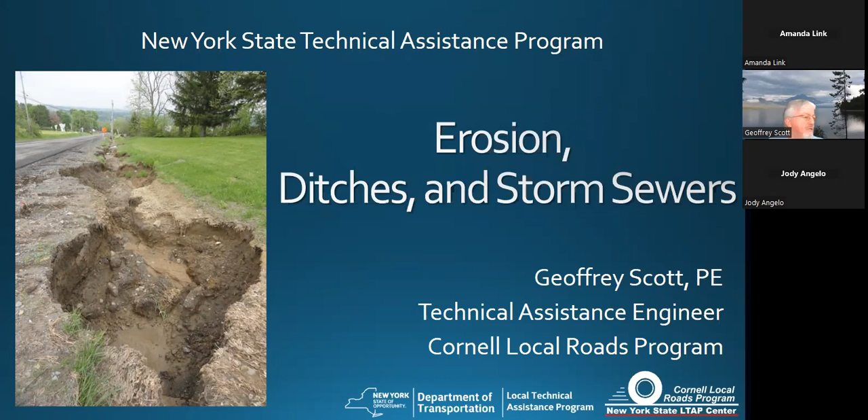The first thing we need to realize is we all live in a watershed. I've talked to people that say, I don't live in a watershed, and to me that's kind of impossible. But anyway, New York State actually has 17 major watersheds. They all drain in different directions, whether it's the ocean, the river, or even over in the Housatonic. A lot of them go to the Great Lakes.

You get the Mohawk River, St. Lawrence, so there's a variety of different locations where they drain to. This portion over here is the Allegheny watershed, which is actually the headwaters of the Mississippi, so we actually feed into the Gulf of Mexico as well, as far as parts of New York State.

But as I mentioned, we all live in a watershed, and precipitation is the lifeblood of that watershed. Without that water getting back into our soil and our aquifer, then everything fails at that point. So when rainfall lands on impervious surfaces or compacted soils, it tends to run off rapidly instead of percolating back into the ground. And ideally that's one of the main things we're going to want to try to do, is get that moisture back into the ground and recharge those groundwaters.

A lot of times, because of impervious surfaces and compact soils, we're going to get runoff that's going to contribute to flooding. And as it travels, it's going to collect up a lot of the pollutants that are going to degrade our water quality.

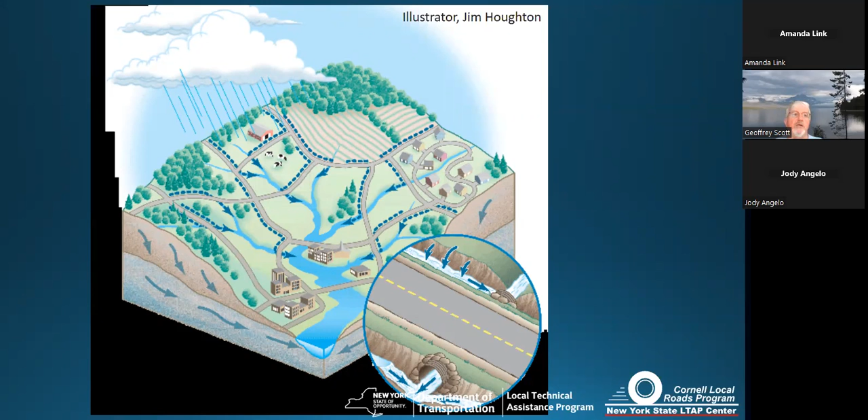So first, we'll talk about erosion. As anybody who's ever seen pictures of the Grand Canyon knows, erosion's been happening for a long time. It's nothing new, but it's becoming critical at this point, particularly in this area, where a lot of the fines and sediment that's being picked up are valuable topsoil.

Essentially, erosion is the removal of soil. It can be done by wind, rain, water, ice, even gravity. It often is the result of exposed, unprotected soil. A lot of times it's difficult to stop. It's best to prevent it before it actually happens.

Once erosion occurs, you've got that sediment transfer, and now you're chasing fine particles in moving water. A lot of the activities we can do to avoid that erosion are just paying attention to revegetation and protecting and redirecting any kind of off-site surface water. So just be aware that it is preventable to a degree. If we make those efforts, we can reduce that erosion and reduce the problems that go along with it.

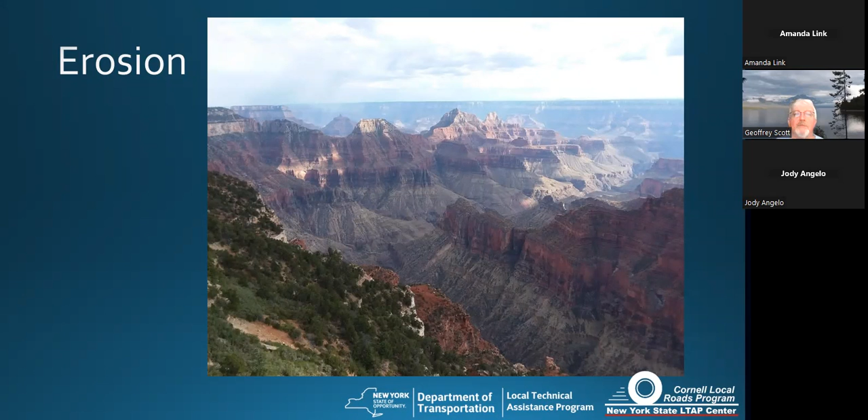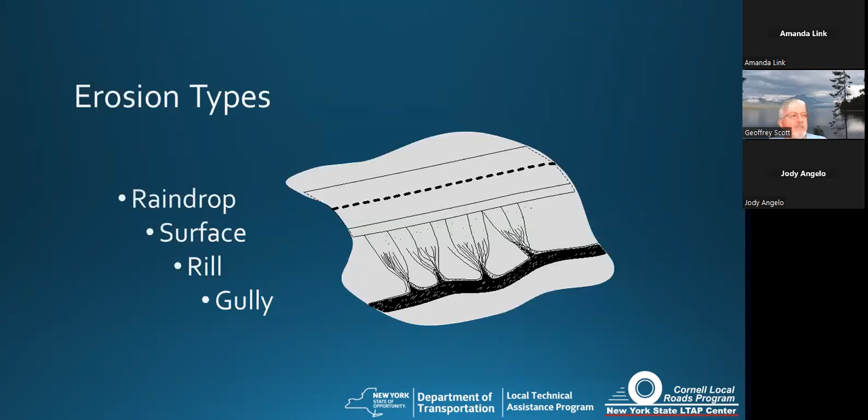Today, we're just going to talk about mostly water erosion. So the main types of water erosion are basically raindrop, surface, rill, and then gully erosion. Typically, erosion is essentially the dislodging of particles.

With raindrop erosion, typically the splash of a raindrop will hit exposed soil. That raindrop travels between 25 and 30 feet per second, so it's got some force behind it. As it hits that soil surface, it can dislodge small particles within that exposed soil. Once that gets dislodged, it can get picked up by runoff that carries it away and be transported downstream.

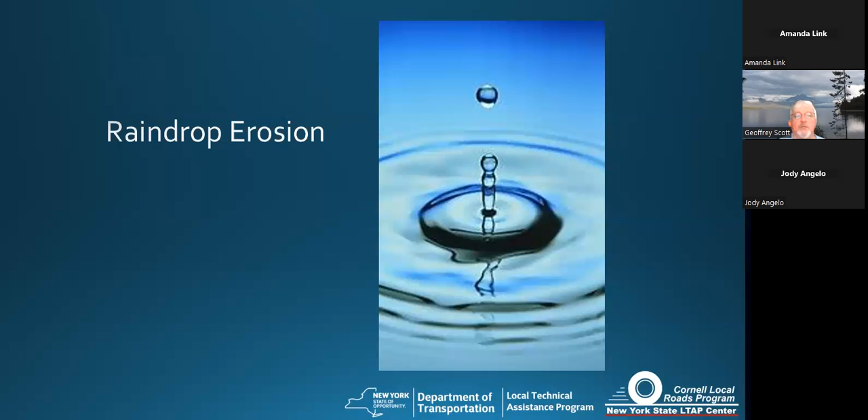So that is basically the beginning part, and this is one of the reasons we want to try to revegetate as soon as possible after exposure, when you expose the soils.

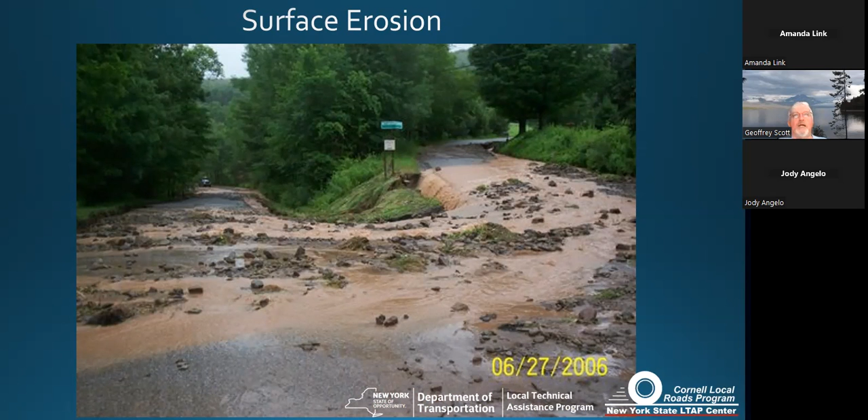ability for it to dislodge and carry particles downstream. Rill erosion is basically once that surface runoff starts to become channeled, develops into rivulets or well-defined channels, and they can be up to several inches thick or deep. This advanced stage of surface erosion is essentially called rill erosion.

And it can happen on stockpiles as well. It's another reason we want to try to protect those stockpiles. Not only can wind take the material off the top of a stockpile, but the rain can wash down the sides, create these little rill erosions, and carry the smaller particles off. So again, another reason for vegetation.

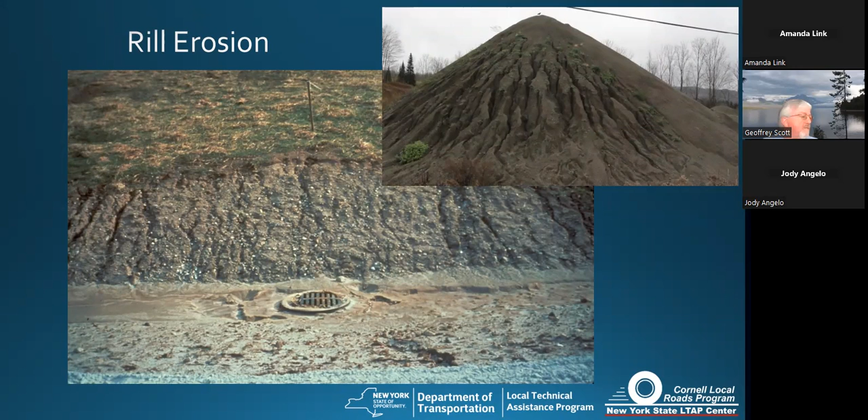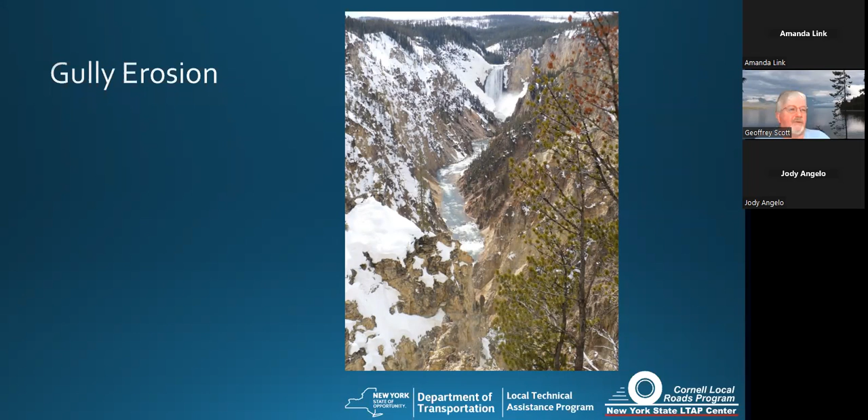Once it gets a little bit excessive, then you're going to get the gullies. Out in the Ithaca area, they have their gorges. Those are cases of severe erosion. They've created gullies, and if they're left unrepaired, they can tend to grow even more.

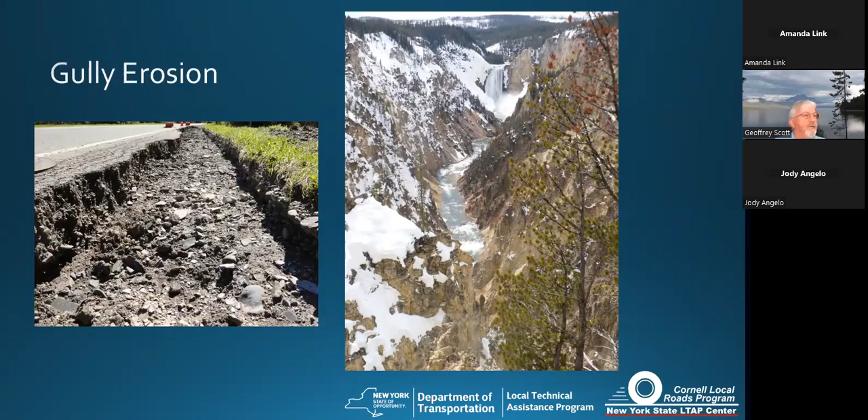This picture here is basically after a large storm. The shoulder wasn't strong enough, wasn't designed properly to shed the water off of it into the ditch adjacent to it. So the water channeled, concentrated, and eroded itself and created a gully adjacent to the roadway. So again, just a more severe situation.

Some of the erosion issues are that moisture flows downhill and picks up those particles. If the embankments aren't strong enough or the flow is excessive, we get cases where the soil itself starts to disintegrate, erode away, and fall and flow downstream. In this case, you can see it's potentially inflicting damage upon this cemetery here. That could be not only unsightly, but dangerous and costly.

So again, removing that soil can cause substantial amounts of damage. It's not unusual for rivers to actually erode away backyards, expose septic systems, and wash out buildings. So again, being able to control that water flow, that excess flow, if we can capture it and somehow get it back into the ground before it gets downstream and starts flowing quickly, we're going to have a lot more success in protecting ourselves.

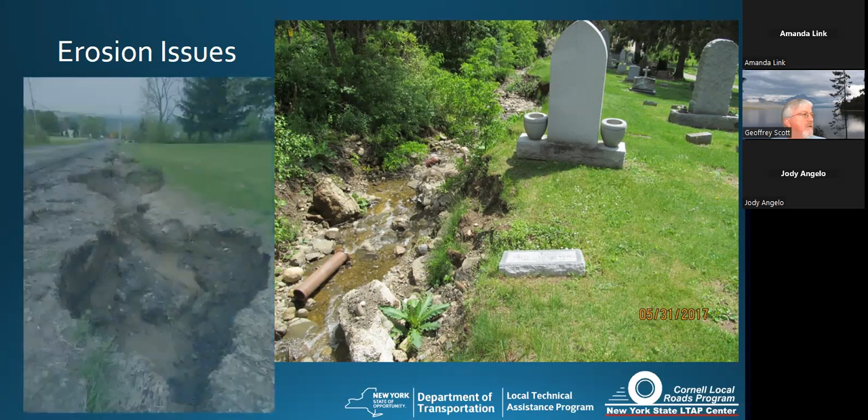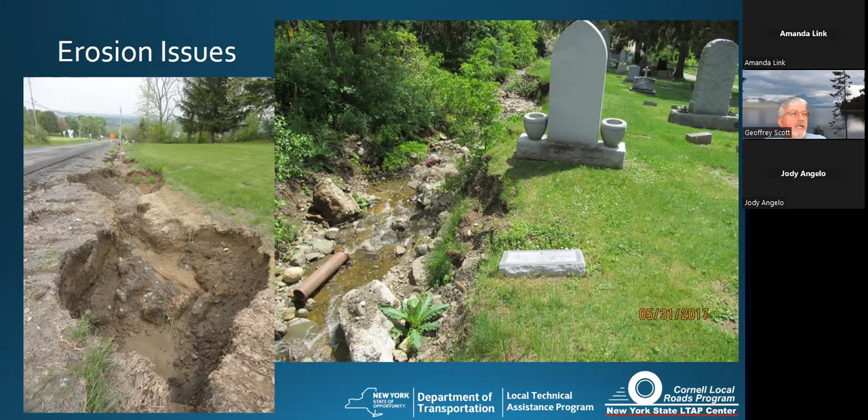Again, it can even happen along the side of roads and ditches and stuff. A lot of times the water will come down a little too fast. We'll get that high intensity rain for a short duration, and it's just more than the soil or the ditches can handle. So there are a lot of issues associated with damage from eroding soil itself.

Then you get the sedimentation, once the particles in the sediment and soil pieces start to flow. They get carried downstream, and as soon as the velocity of that flow tends to slow down, the particles fall out because it no longer has the force to push and carry them. And this is what you'll get.

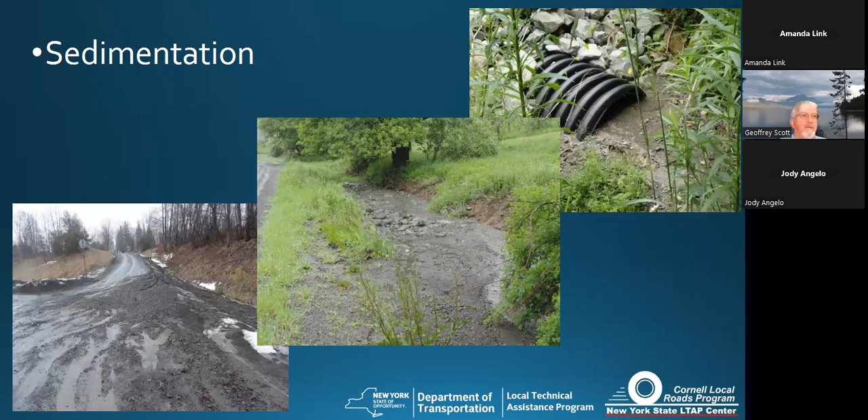You'll get the water flowing out from ditches up above. You'll even end up with culverts full of sediment. All this adds extra maintenance and labor. So we can try to control that erosion and keep the soil where it belongs. It's going to be better not only for the surface of the soil where it is, but also for controlling our maintenance downstream.

So some of the obvious things you see is the erosion that comes out. You start to see the soil moving and eroding your lawns, your backyards, cemeteries, or whatever it might be. But there are other impacts that happen as well. As fine particles flow downstream through that network of streams in the watershed, that sediment can be discharged into ponds, lakes, and a variety of other places.

As sediment flows out of streams and into lakes, once it slows, the particles drop out. And as they drop out, those sediment particles land on top of the vegetation. Once it covers them up, it reduces the ability for those plants to do their photosynthesis process and release oxygen within the water. So as that sediment lands on those plants, you're going to have a decrease in the amount of dissolved oxygen, which can result in a decrease in the ability for the aquatic environment to survive.

It can also cover up and land onto small aquatic animals, which can cause them to smother or suffocate. It also delivers a variety of different pollutants that can be harmful not only to the aquatic environment, but to people as well. So we need to be aware of what we're doing here.

Additional issues: aside from the sediment being carried down, it carries a variety of different things. There's debris or gross solids, which include trash, leaves, litter, organic debris, which can all result in human illnesses when they collect and enter into ponds, swimming areas, or various places where humans interact.

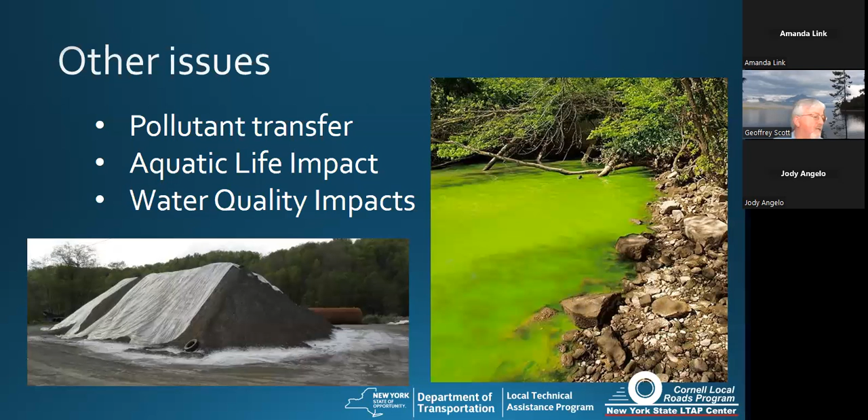Chlorides, essentially salts, can impact the survival of macroinvertebrates and freshwater fish. So ultimately, the water quality of these receiving waters can be drastically impacted and cause the loss of life within that water body itself, along with some of the trash that can be hauled with it.

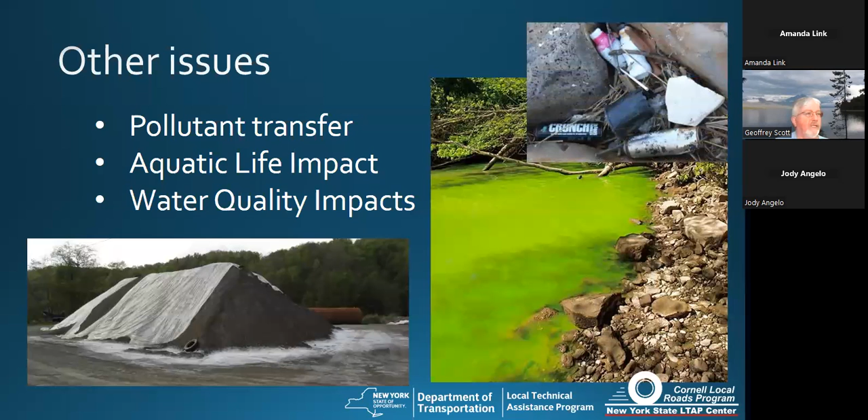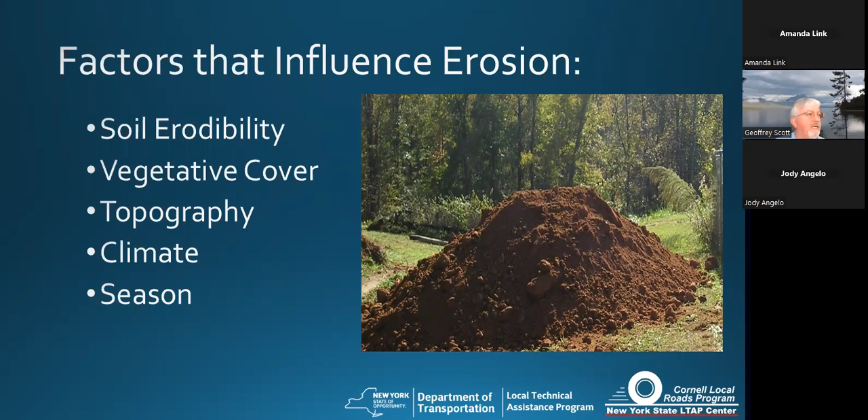Soil erodibility is basically the vulnerability of the soil to erosion. It includes soil structure, texture, and the percentage of organic material. Most erodible soils generally contain high proportions of silt and very fine sand, smaller particles that can be picked up and moved easily. The presence of clay, except for dispersive clay, tends to decrease soil erodibility. Clays are sticky and tend to bind the soils together, and organic matter helps maintain and stabilize the soil structure through aggregates and interlocking of the soil itself.

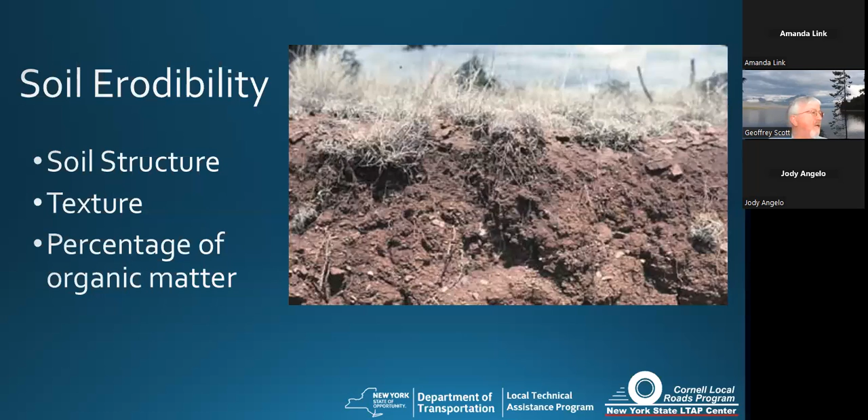This is a table from the new blue book showing different types of soil erodibility for different soils and the slopes associated with them. You've got gravelly material, a little larger with a low percentage of fines, so you get low to medium erosive potential. But as you get into finer material, that potential increases substantially as the slope increases. So being aware of the type of material you have really impacts how easily that soil is going to erode.

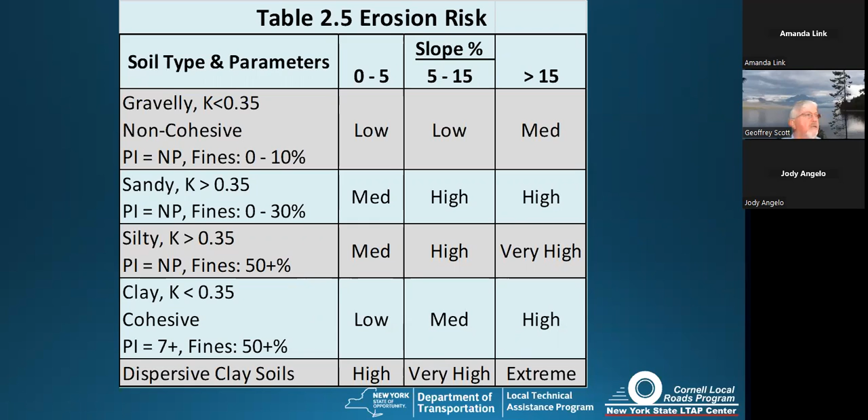Vegetative cover protects the soil from erosive forces, particularly raindrop impact and runoff scour. The top growth shields the surface soil from raindrop impact, while the root mass holds soil particles in place. The grass can also serve as a buffer strip that helps filter out a lot of that sediment and the contaminants carried with it in surface runoff.

Grass can also slow the velocity of runoff and help maintain infiltration capacity with the soil. As the roots go in, moisture can follow those roots into the soil. So the establishment and maintenance of vegetation is probably the most important factor in minimizing erosion during development. If you can keep that vegetation there, it's going to do a lot as far as preventing that soil from being relocated.

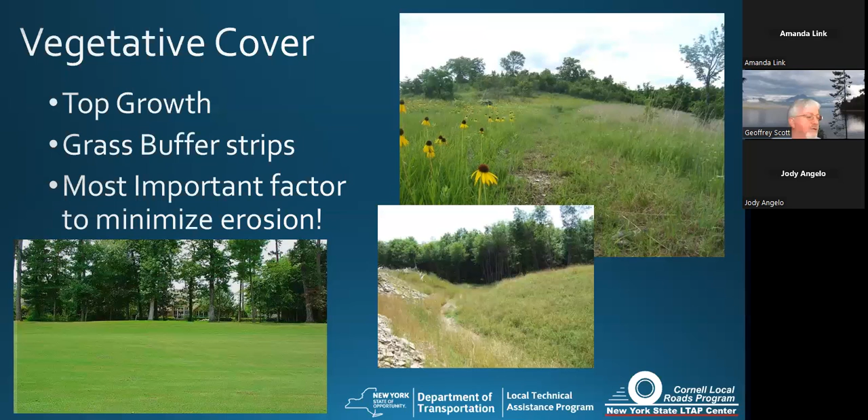Topography, or grades, essentially the slopes, the slope length, and steepness can greatly influence both the velocity and volume of surface water being controlled. Longer slopes can deliver a lot more water to the base of a slope, and steeper slopes can increase runoff velocity. When you get an increase in volume of water, you can have problems at the bottom because of sheer volume going through there.

If the system isn't designed to carry that volume, you're going to have flooding and erosion where it's flowing but not supposed to be, as well as issues from steep slopes. Once that velocity kicks up and moves extremely fast, the force of the flow increases its ability to dislodge smaller soil particles and carry them downstream. Both conditions can enhance the potential for erosion to occur, which is pretty obvious, I suppose.

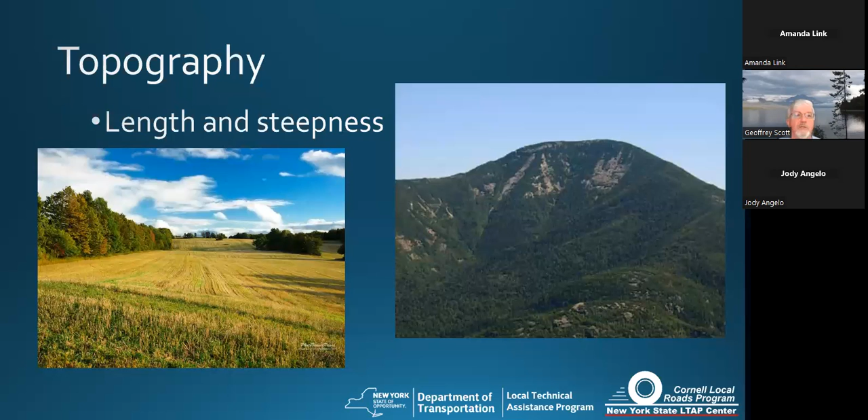Climate, or otherwise weather, can basically affect the erosion potential. Rainfall characteristics directly influence the amount of runoff that's generated. These include frequency, intensity, and duration. As the frequency increases, it decreases the chance for runoff infiltration to occur between storms, particularly

if that soil has already become saturated, then that surface water is just going to take to the hills, so to speak, downhill. And that's something we experienced with Irene and Lee. The first storm came through, filled all the ponds, filled all the storage capacity, saturated the soils, and two weeks later, the next storm came through. There wasn't really much that runoff could do but go downhill, downstream, which resulted in substantial amounts of flooding.

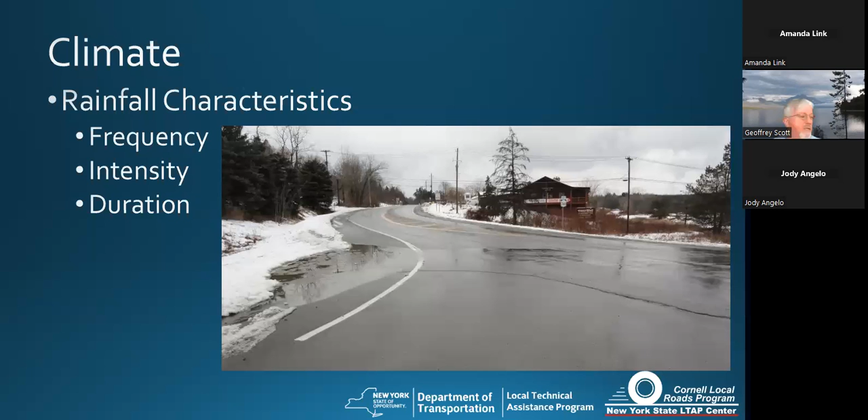As the intensity of the rainfall increases, you get to shorter durations. You might get 5 minutes, but 5 inches of rain in 5 minutes is going to cause substantial problems, because the rainfall is going to exceed the ability of the soil to actually absorb a lot of that moisture.

Seasonal variations of temperature and rainfall can define different periods of high erosion during the year. In the spring, there's a high erosion potential because as the top surface soil thaws and the ground beneath remains frozen, the top layer above the frozen layer is actually going to become more mobile. So again, there's a potential for that as well. A low intensity rainfall may cause substantial erosion because the frozen soil below is not allowing it to infiltrate.

In the summer months, the erosion potential increases due to more frequent and intense rainfalls. As we get these storms in the summertime that come in short doses but large volumes, again, it exceeds the infiltration ability of the soil.

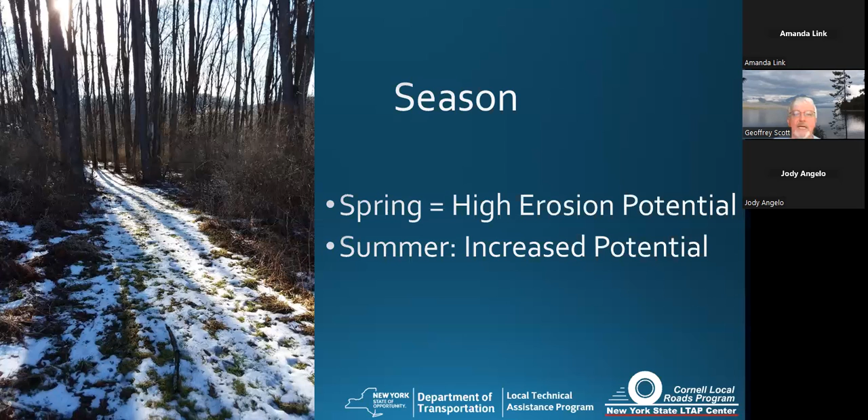So I guess we have the first question here. We're going to try to stick questions in between as we go. Question: moving sediment in stormwater does not, that's the key there: stabilize stream banks, carry pollutants, impact aquatic life, or promote growth in harmful algae blooms.

Are we getting selections here, Amanda? Yes, people are answering. I'll wait for our magic number of 75%. All right. We're almost there.

Yeah, the key word there was not. Moving sediment does not stabilize stream banks. Moving sediment does carry pollutants. It does impact the aquatic life. And it does promote the growth of harmful algae blooms. We'll touch a little bit more on that as we go. But yeah, moving sediment does not stabilize stream banks.

All right, so we'll move on to the next one. If I can get it to work again.

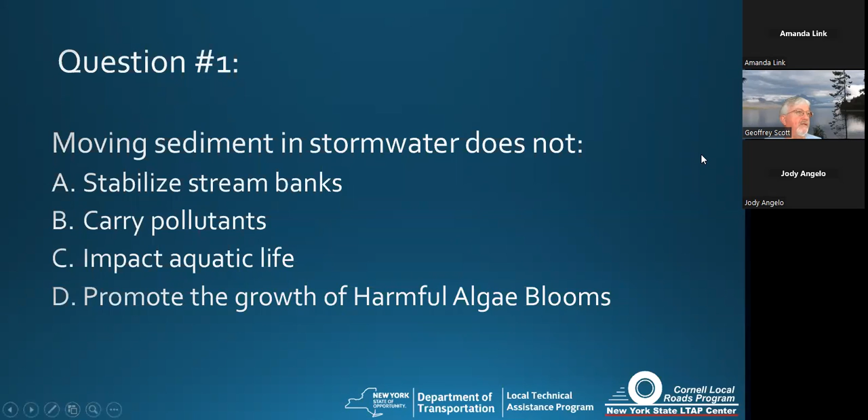Question 2. What concerns are there for nutrients carried by stormwater and sediment? First one, nutrients are harmless. Second one, nutrients keep soil stabilized. Third one, nutrients cause excessive and rapid growth of aquatic vegetation, causing harmful algae blooms. Or 4, nutrients are healthy for aquatic life.

Answers are rolling in. We got about 5% more to go. All righty.

And the one that everybody got, 92%: nutrients cause excessive and rapid growth of aquatic vegetation, causing harmful algae blooms. Nutrients are healthy for aquatic life? Not necessarily. At least phosphorus tends to fertilize the vegetation. Unfortunately, a lot of that is algae that gets fertilized the quickest, which is where we get the algae blooms. Nutrients keep soil stabilized only by promoting growth in vegetation, but not within the stormwater.

And nutrients aren't harmless for the most part because of what they can do. The answer was number 3. All right, we'll just keep moving here.

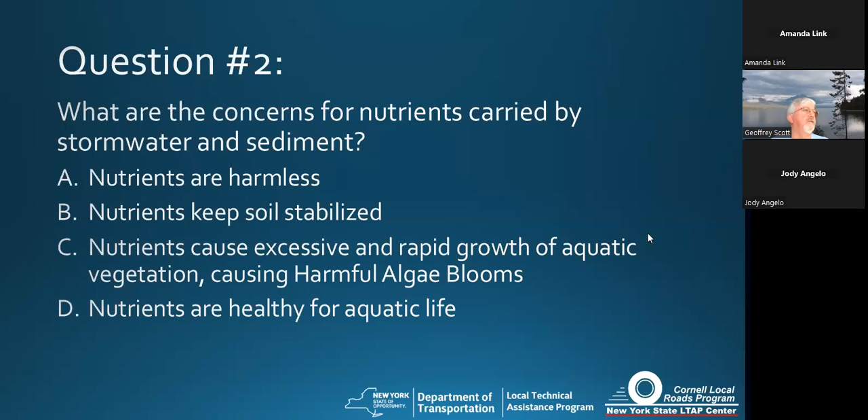We'll get into ditches. Ditches are an integral part of the watershed and can be critical for the safety and longevity of the highway itself. They serve to convey surface water, typically away from or through an area safely with minimal impacts. Roadway ditches also collect surface water from the base of the road or surrounding land and can divert water to and from the highway. Most often they carry the surface runoff to natural streams.

Ditches are often used by surrounding landowners to carry flow of the water away from their fields. Basically, field tiles collect that subsurface soil water, which reduces potential for it to go back into the soil. But again, they want to dry out that soil so they can actually use the farmland. But a lot of that's diverted into the local ditches.

A properly managed ditch is typically relatively shallow and only drains a small area. In many cases, the ditches carry the additional flow from the properties adjacent to it. And if they're not properly designed and maintained, they can result in additional maintenance and untimely costs as the damage happens. So for any kind of ditch, but particularly along the roads, maintenance is critical for both the highway and the environment.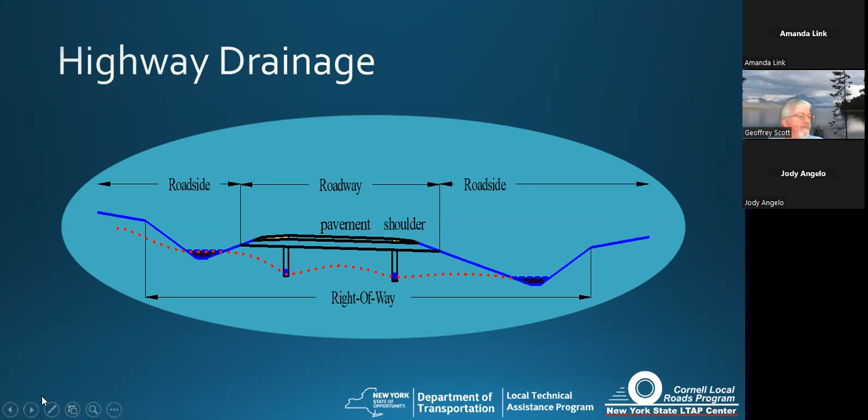Here's another sketch of streams, road ditches, and drainage basins. The road surface typically can cover up to 1% of a watershed surface area, and the drainage basins collect another 22% within that watershed. The red lines are road ditches, and the yellow area is the drainage basins for each of these ditches. Blue lines are streams, and you can see where the ditches discharge into those streams, and it works its way down as it goes.

So it's just a way of illustrating how ditches collect a lot of that surface water and subsurface water within that watershed, and how it impacts the total flow within that watershed itself.

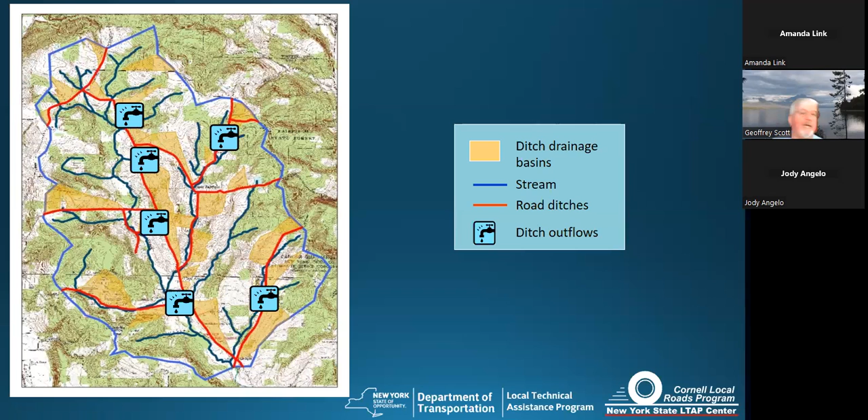The pollutant transfer, as we mentioned a little bit earlier: these roadside ditches can carry a variety of types of sediment along with them, and a bunch of types of pollutants, the heavy metals, the chlorides, the nutrients, particularly phosphorus. Phosphorus will influence growth in fresh water as far as algae blooms, so that's one of those things we need to keep an eye on. That's directly related to fertilization and controlling waste discharges.

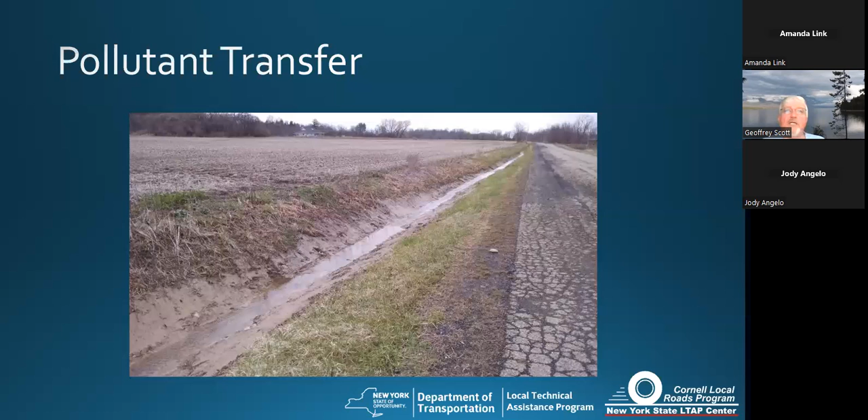So again, ditches can transfer that pollutant further downstream, and they're a direct conduit too. If they're not controlled or built properly, they can substantially impact that environment that it's leading to.

Safety is another issue with ditches. When a ditch is too deep, it can become a safety hazard. In this case, you can see where the mailman basically went to pull over and lost himself in the weeds, apparently. But it can be dangerous if you're moving at any kind of rate of speed and you get stuck in there. You could easily get substantially hurt. Something that deep may actually need a guide rail.

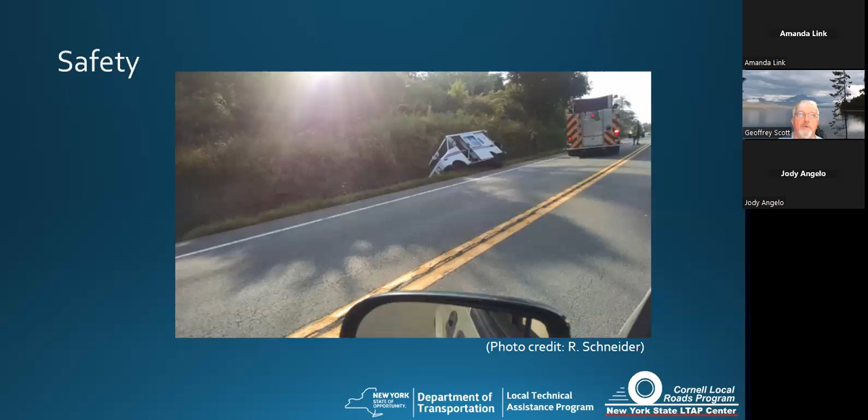Typically, ditches don't need to be that deep. Making them deeper doesn't help. If you've got a driveway culvert within your ditch, that's going to be your limiting factor in that ditch. That's going to control your flow. So if you've got a 12-inch culvert and a 4-foot ditch, that ditch is more of a hazard than a value. So just be aware, a deeper ditch does not improve your flow within the ditch itself.

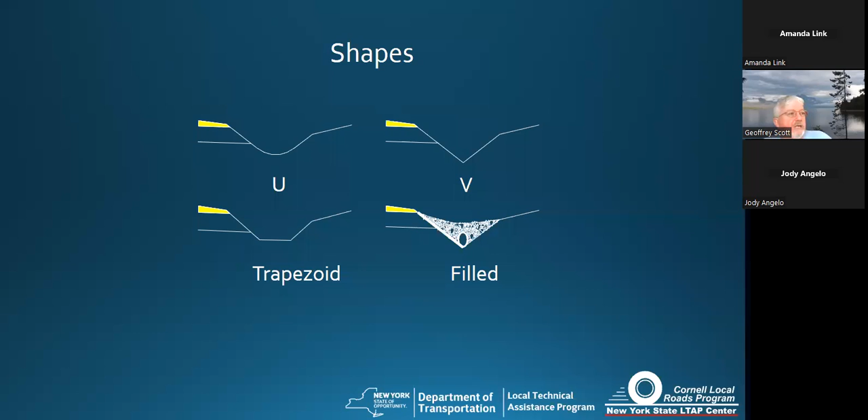Several types and shapes of ditches. You got the U shape, the V shape, the trapezoidal shape, and then there's always the filled shape. We'll talk about these. The U shape typically is done by a Gradall, where you scoop out the back and you pull it up and take that extra sediment within there. It's more efficient hydraulically. It's a good shape for erosion control, and it can be maintained and built pretty easily with an excavating machine.

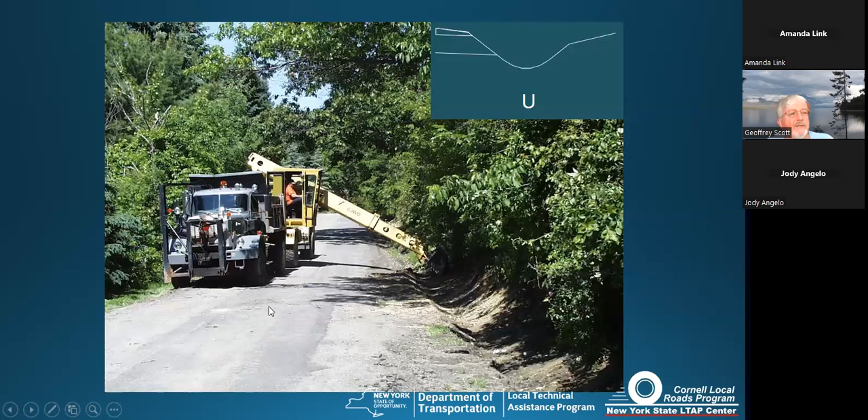A lot of times the problem with this is that when they're digging out those ditches, they actually pull that bucket toward the road, and they start to erode away the embankment here, which makes for a steep shoulder and results in not only erosion, but a safety hazard. So again, there's different ways you can do it. If you dig from the back, you can take that back slope out, and then you can cuff this off so that moisture runs into the ditch and flows.

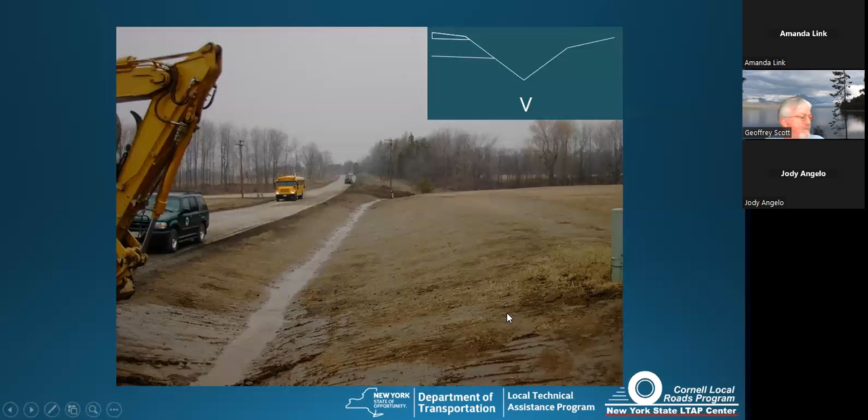You got the V ditch. This one's fairly easy to construct. You can do it with a grader. However, because they are a V, you've got this center point here that tends to concentrate the flow, and as that flow concentrates, the speed of it tends to accelerate, and then you get the increased potential of erosion. Again, it's always good to try to stabilize these. They've made an effort here of stabilizing with some hay and straw, but more needs to be done. That's inadequate.

You get the trapezoidal shape. Hydraulically, this is the most efficient because you're taking that flow and spreading it out over a wider area. You don't have those concentrations. And typically you use them for a ditch that's carrying a large amount of water. As you keep it spread out, the velocity of that flow is going to be decreased. Part of the problem is we just don't have the right of way on a lot of the local roads to build these. So that's an issue. They can be difficult to construct.

But if you do have a situation where you need to construct something like this, reach out for help. Soil and water conservation districts are here for a reason. They've got a lot of knowledge on what needs to be done. They can direct you to the right vegetation that needs to be planted. Again, the resources are there. Don't hesitate to use them. That's what they're for.

And sometimes ditches are filled with large stone to make them safer for traffic. When you've got a deep ditch with a steep slope, maybe you want to bring that elevation up so it's not as damaging to vehicles. So basically what they do is put in a culvert, typically in the roadside. They'll put some sort of fabric, some erosion control blanket, get your perforated pipe or your solid pipe in there. Typically a perforated pipe so you can collect the flow that's coming in. And then you backfill it with stone. Here's an example of it. They did the change from the ditch to a subsurface pipe.

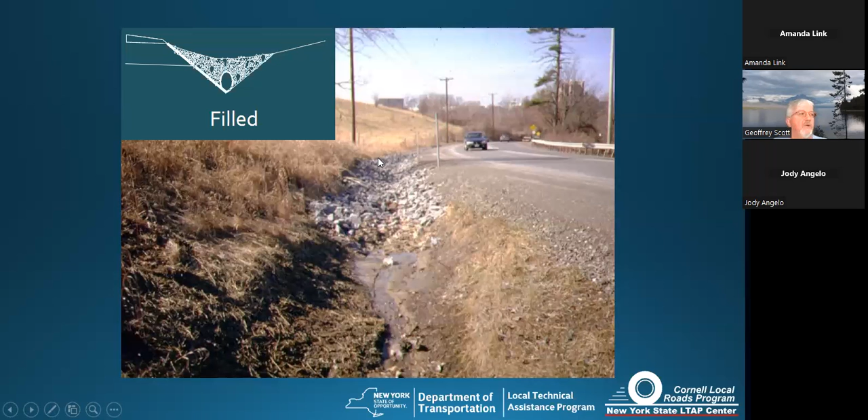So again, it's just another means of doing it. But again, another way of protecting if you've got a safety issue with your deep ditches or erosion problems, you can actually channel them and collect it in pipes and redirect them.

So as you mentioned, most ditches have most of the capacity that they need. Typically, the need for a ditch is pretty small. Again, when you start getting other things feeding into it, then it's going to be a little bit different. Then you should actually reach out to get some help, whether it's the soil and water or an engineer, or even contact us. We can do some help for you. But typically, historical perspective is enough to determine if the ditch is large enough. The flows are normal, and that's a rule of thumb.

If it's doing well, then again, your culverts are going to be your limiting factor. But ideally, as far as the depth goes, this is your clean, free-flowing subbase in your roadway. Any moisture that comes up or through it ideally is going to drain out here. So typically about a 1 foot depth difference between the bottom of your free-flowing base in your roadway and the bottom of your ditch to keep that ditch flowing.

Again, your capacity is basically going to be limited by the culvert pipes that you have in there. So if you've got 12-inch or 18-inch, that's going to be your capacity of that ditch. So an 8 foot wide by 4 foot deep ditch going into an 18-inch pipe doesn't make much sense.

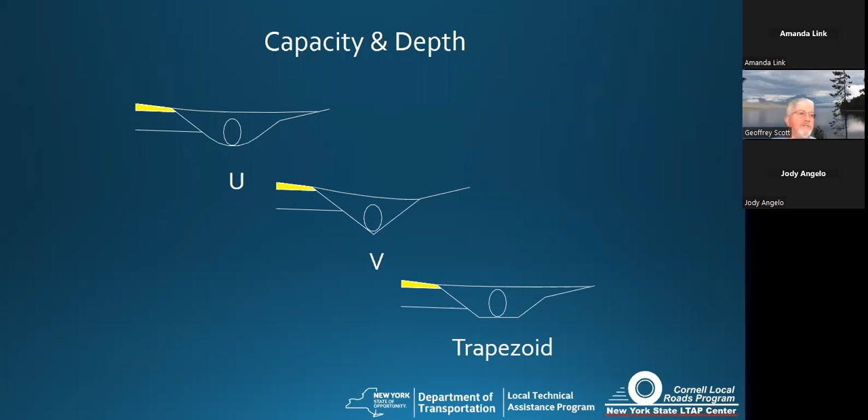Again, side slopes. You want those side slopes on those ditches to be somewhat traversable if you can. Someone gets off the road, it'd be nice if they could just work their way back out instead of just ramming right into the hole. Flat as possible is ideal. Again, we're limited on right-of-ways on a lot of the private roads or the smaller local roads. Slopes steeper than 1 on 2, vertical to horizontal, tend to be unstable and may need a guide rail to protect them from any kind of damage or errant vehicles that are going through there.

Ideally, a slope 1 on 3 is considered good. And for more information on this, you could reach out to our drainage manual, chapter 9. It's got more on the slopes themselves, but again, if we can keep them flatter, they're going to be a lot safer and they're going to be a lot easier to maintain. If they're flatter too, you can mow them, and that's going to help as far as maintenance goes.

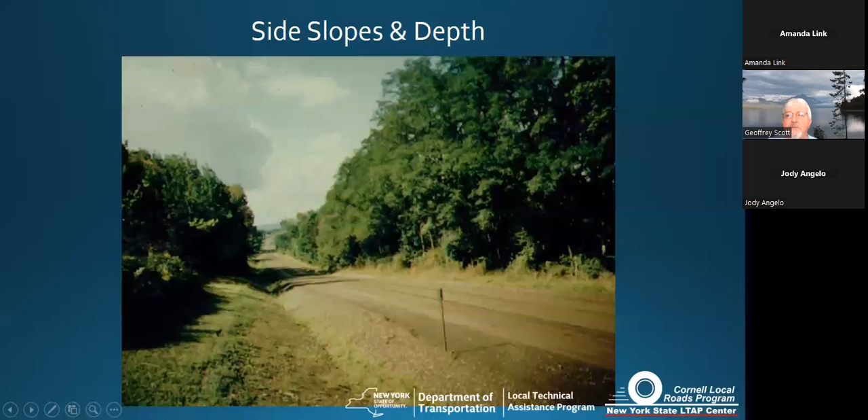Here's a case for the state over by Cornell. This is Cornell campus on the opposite side of the road, and some of the orchards on this side over here on the left side. But they came through and they cleaned their ditch. So as I mentioned, it's greater than 1 on 2, so you can see this ditch is pretty steep. It could be potentially unstable. So we came back a week or so later after they had done this, and you could see that slope is unstable. As it started to dry, that soil started to slough in here.

There's actually a cross culvert right here that goes across. So you can see on here, it's right by this tree. There's a marker right there for the culvert. Again, that culvert is right here that drains through. Because it started to slough in and carry a lot of the sediment downstream and started creating problems, they came in and actually filled it.

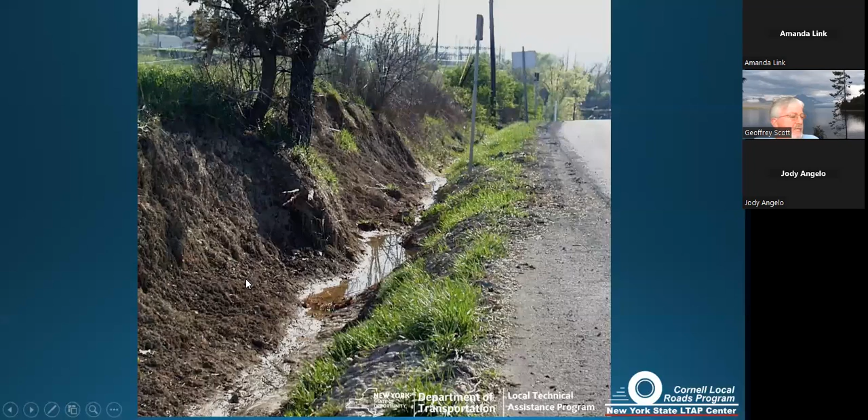So maintain that slope from the roadway, and the flow is just going to come off the shoulder and then into there. Your free-flowing base, you don't really want to mess with that. But if you want to clean it, maintain the same depth, you take it from the backside. And that'll reduce a lot of problems later on.

We've got a few pictures here. You can see that they kind of cleaned up here, left a little bit of vegetation across here. But again, they didn't do any effort to stabilize it. It's going to be actually difficult to get any kind of vegetation in there now because of the type of soil, and a lot of the fines are gone. But again, you can see they've cut that slope. The slope could potentially become a little bit unstable.

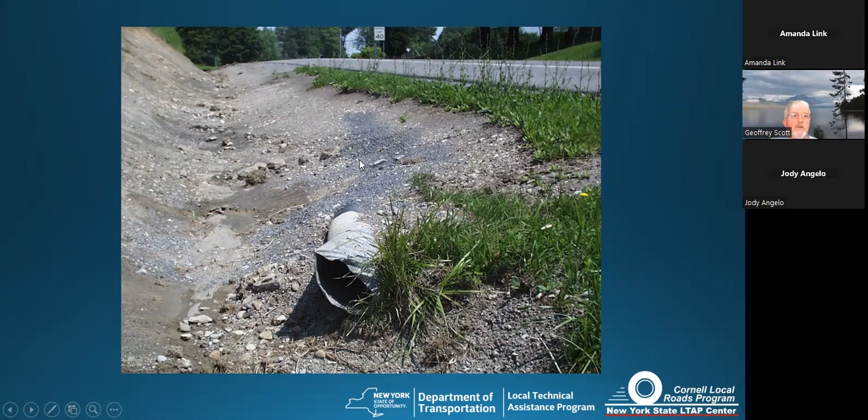There's another case. They actually did a nice job. They've cleaned it from the backside. They've got a nice U shape to it. They've got a nice shoulder here to serve as a filter strip. Unfortunately, they didn't seed it. They didn't stabilize. They didn't try to get some vegetation in there.

When it comes to this vegetation, don't be afraid to reach out to the soil. Most of the soil and water conservation districts in New York State have their own hydroseeder. You do have one in your county. Reach out to them before you start doing your ditching. Contact them. Try to coordinate your schedules.

And once you get done shaping this thing and getting it in good shape, have them come in and hydroseed it. They'll recommend the type of seed that's best for the area and the soil. You would pay for the seed, but they would come out and take care of the stabilization with their equipment. So it's a service that's out there. Don't overlook it. Again, the idea is we're just trying to protect the environment and stabilize our roads as well.

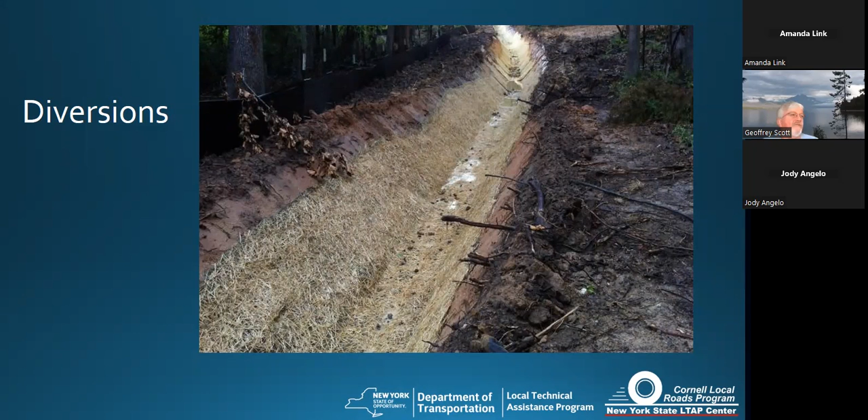Diversion ditches, again, typically diversion is basically a conveyance channel. You want to divert water off site or away from a construction site. A lot of times they can be temporary. They can be rock lined, they can be stone. If they're rock lined, the stone is going to be based on the flow, or you can line them with some sort of fabric. And again, typically temporary, comes in a variety of different things.

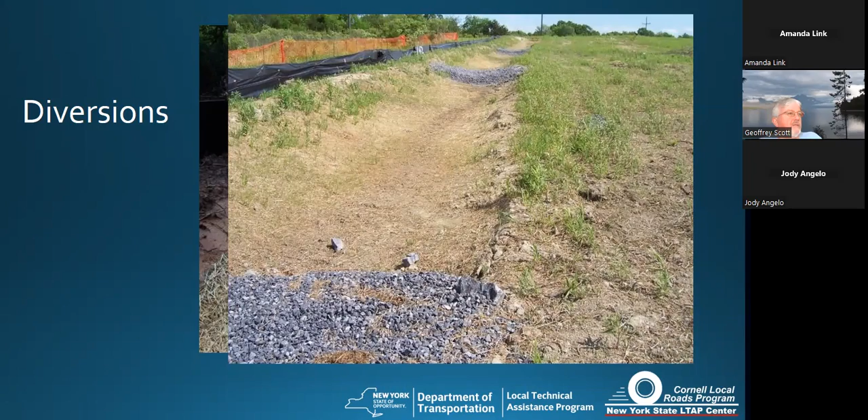They made an attempt here to stabilize it with some seed, but it looks like it dried out before it was able to stabilize. Another job site where they're diverting water and trying to collect it and get it away from the main spot where they're working. Keep that area dry, minimize any kind of erosion off that site.

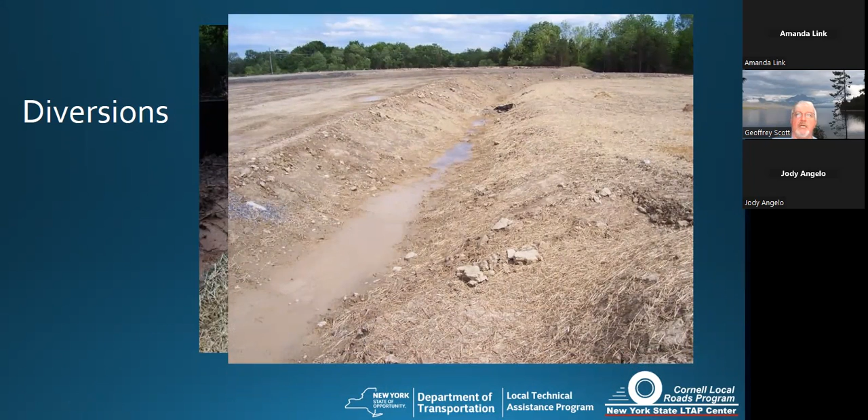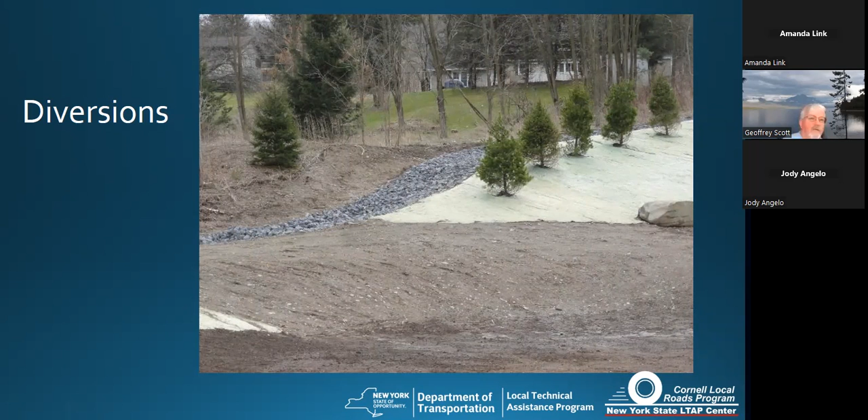And this one I pointed out before. Again, they built a hotel down below. This is their sedimentation pond for the parking lot. But they've got this all stabilized here, and they've got this diversion trench that goes up and around the whole facility. It collects that runoff from the upper wooded area. So again, the ditches have different purposes and uses, but controlling and collecting that water and preventing erosion is ideally the ultimate goal.

So storm sewers, again, typically these are subsurface collection systems designed to collect and remove surface runoff. Used to be commonplace in a lot of the residential developments, and they're in urban areas. And typically the most visual thing you might have as far as that are these inlets, drainage inlets.

As with ditches, again, the intent is to remove that surface water. As that water runoff flows across those impervious surfaces, it collects a lot of those nasty pollutants, the hydrocarbons, the debris, the sediment, the chemicals. And typically they'll empty directly into these drainage systems. If they're not maintained, it becomes a direct conduit to the discharge into any kind of local water body itself.

Limiting factor in a lot of these can be the grates. You've got bicycle-safe grates, heel-safe grates, depending on if you're in an urban area or whatever it is. Intake of those grates will vary depending on the type of openings. The more metal you have, the smaller the open area, the lower the ability of that structure to take that flow in. A lot of manufacturers have flow designs built in, typically 4 or 5 inches of head over top of those culverts for maximum intake. But if you're in a roadway, that 4 or 5 inches might not be the best thing to have. It might become a hazard. So be aware of where you're putting these things, what the flow is going to be, and the type of grate you're going to have. It makes a difference not only for safety but for inlet intake.

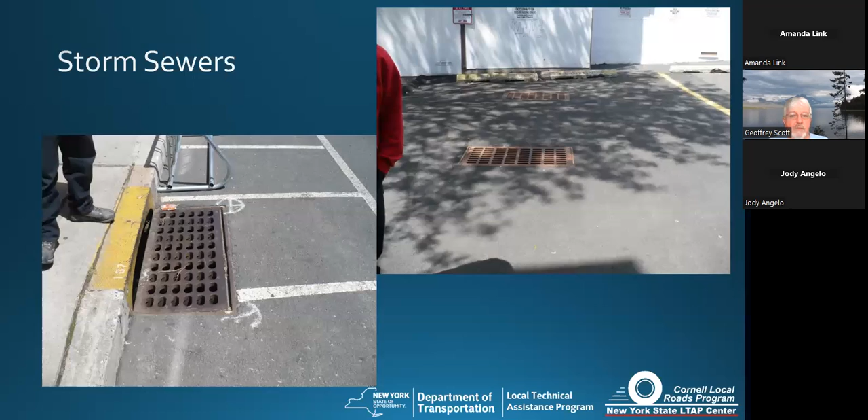Catch basins typically have issues similar to multiple pipe culverts. If they're undersized or don't have proper cover, they have the potential for floating, particularly with plastic pipes. If you don't have a lot of ballast on top, air gets trapped in there, it's going to rise and float. You've also got the pipe separation issue. Once they start to separate, you're going to lose that support around it, and you're going to start to have problems from the surface down.

There's also sediment buildup. Typically a lot of these structures have a sump built into them. Ideally, as the water comes in, any sediment will get in there, the flow slows down, and sediment falls out. Occasionally they'll have an outlet that's turned down — the idea being that any fluids or oils that float on top won't be drawn out, since you're drawing from below it.

So these are different factors and items inside these structures. Ideally, once those solids reach the one-third level of the storage capacity in that basin, it should be cleaned. Once it gets higher, as flow comes in, it churns it up and causes that sediment to get resuspended and moved right out. So regular maintenance on these things is important as well.

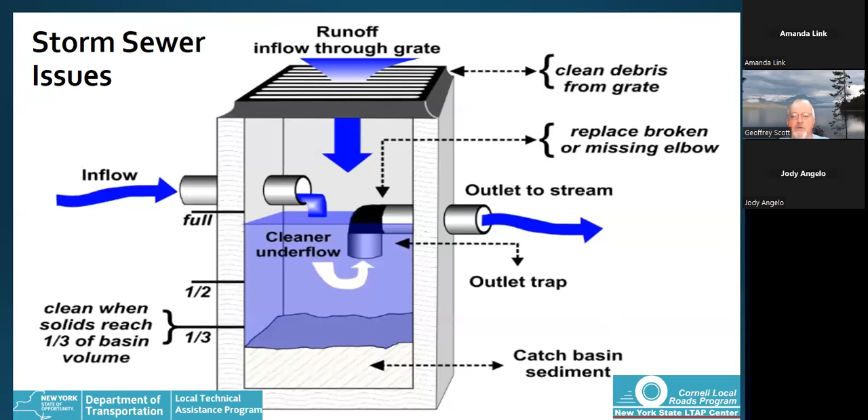And if you've got a gravity flow system, like you would with stormwater, unless you've got a pump, you're going to have to be aware of where those pipes are. Don't design a pipe to go through a water pipe. Just be aware of what you're doing and double check as you're going.

Discharge points: unfortunately, as runoff runs over those impervious surfaces, you pick up hydrocarbons, sediment, and chemicals. Older systems often direct this flow directly into the river, so be aware of what's going on there. If you can collect that sediment within the basin and keep the catch basin sump clean, you'll reduce the sediment flow carrying debris with it. These flows, when they discharge, are highly concentrated in the pollutants they're carrying, and then become harmful when discharged.

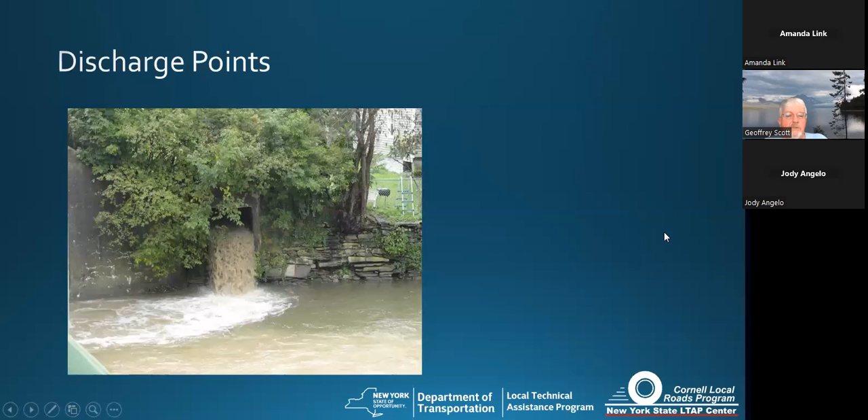So we need to be aware of that in multiple cases — a lot of these systems were built historically. This one is the village of Nyack, where their system discharges into the Hudson River. This one here is in central New York, collected from a small village that discharges into one of the rivers there. So again, discharge points are important — you need to be aware of where they're going and what's happening.

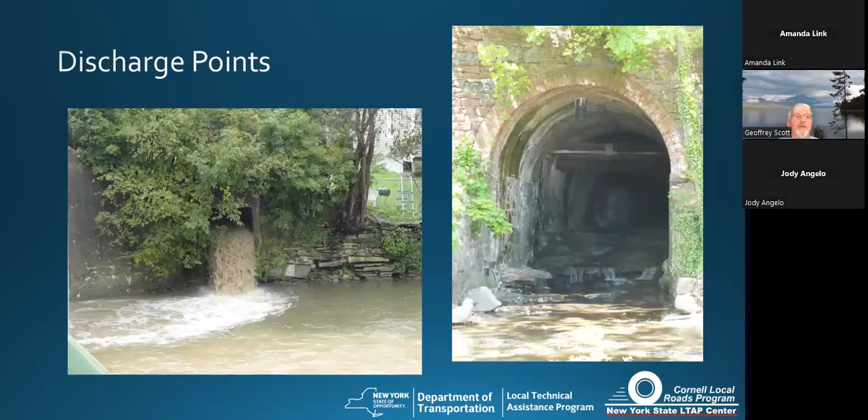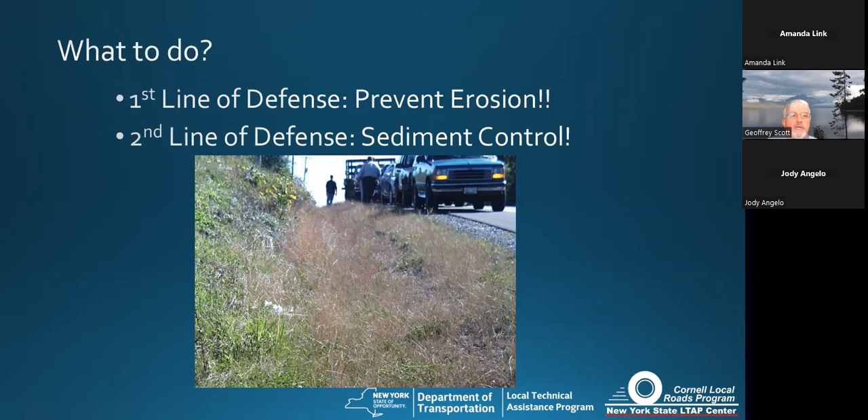So what can we do? Well, ideally, as per the DEC, preventing the erosion is your first line of defense. If you can prevent that sediment from being dislodged, you're going to have a lot more success on reducing that erosion. Once that sediment gets moving, now you've got to battle with the sediment control. You've got to try to collect it, slow it down, try to clean it, maintain it. A lot more maintenance once that sediment starts getting moving. So again, if we can prevent that erosion in the long run, we're going to be a lot better off as far as everything else later on.

So essentially, when it comes to vegetation, vegetation includes grass, brush, trees, and can all be planted to kind of reduce that erosion potential. As I mentioned, Soil and Water can recommend different types of vegetation that are best for your area and your soils, and reach out, they're there to help. The general rule is basically, if you can use vegetation, do it, because it's going to be a lot easier to maintain.

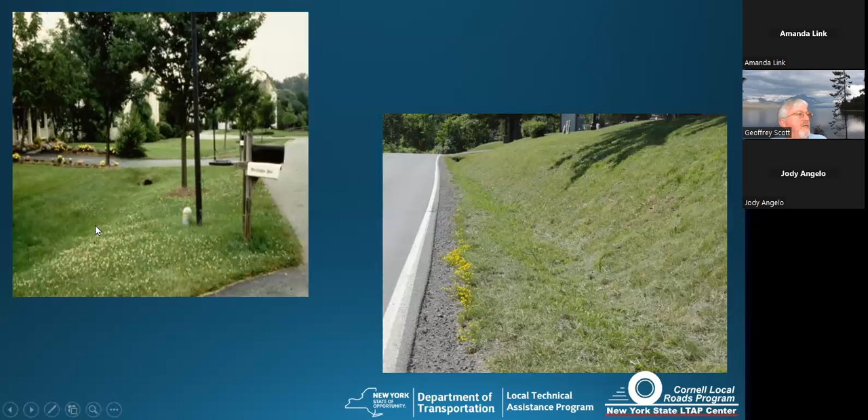It's going to be a lot cheaper to install and more pleasing to the eye. Again, with this, you're going to have that vegetation. It's going to filter out some of the sediments. It's going to promote infiltration back into the ground. There's a lot of benefits to it.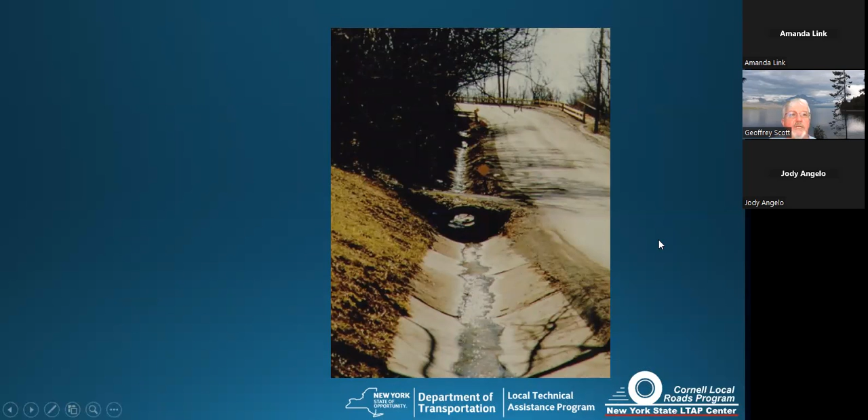Other options, again, for discharges, possibly you could use some of these heavy fabrics. First time I saw these, they were used as flooring in pig barns of all things. But they've used them for various types of livestock, and it also serves as a good matting for an outlet at a culvert head.

As I mentioned before, those ditches typically have a lot of volume. Once you stuff it into a little pipe, the only way you can get that amount of volume through it is to accelerate the speed. So as that velocity comes out of here at high velocity, you want to protect that somehow, you want to kind of protect that outlet to keep it from eroding out.

Again, you can use erosion control blankets. If you're installing these, you want to start at the low end and work uphill. That'll prevent the flow downhill from getting underneath and tearing it up. And again, you'll want to pin them down, keep them tight. Put topsoil underneath it, put your seeding down underneath it, and allow that stuff to grow up within it. Over time, it'll become a vegetated channel as well.

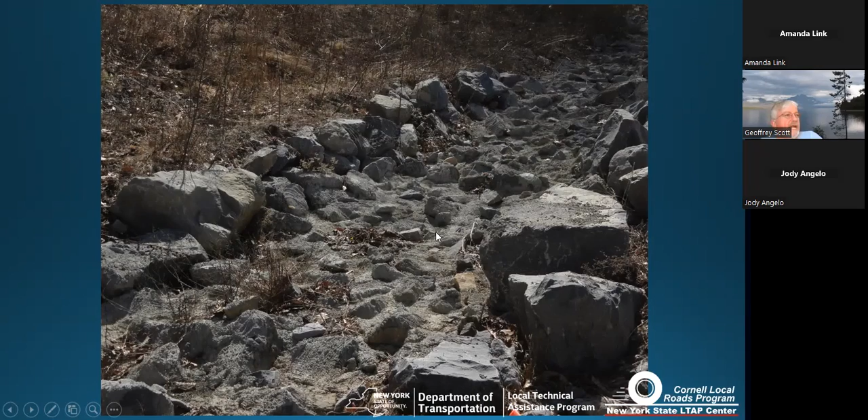In some cases, the riprap may not be large enough. I came across this in Washington County. Essentially, the slope was too great, and it was actually causing a lot of this aggregate to be washed downhill. So they ended up coming through with a slurry to help stabilize that stone. It actually works out pretty well. They can get in here with a pressure washer and wash out any kind of built up sediment.

One thing to notice with this is with any kind of loose concrete, do it in dry weather if you're going to. You do not want the chlorides and the materials within that concrete getting into any kind of water body.

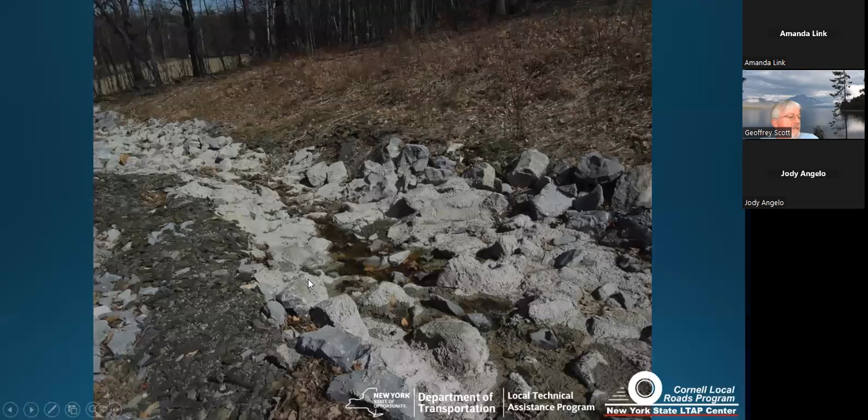Check dams are basically a means of slowing down the velocity as it's going through. If you can slow that velocity down, you're going to reduce that potential for erosion. In this case, you've got permanent ones. This comes out of a stream. You'll notice it built up. You want to try to concentrate the flow with all these check dams if you can, keep them to the center. This allows that as the water falls, you dissipate energy. Instead of it accelerating, it's going to drop and fall. The splash will create a dispersion of energy, and then the flow will maintain substantially slower.

One of the important things too is creating a subbase here, a splash pad. As this washes over, you don't want it to erode out and cause this whole thing to fail. But again, these can be temporary or permanent. There's a variety of different methods out there - it can be stone, sandbags, wood, concrete, gabions. And the idea basically is to slow that discharge rate as it flows through.

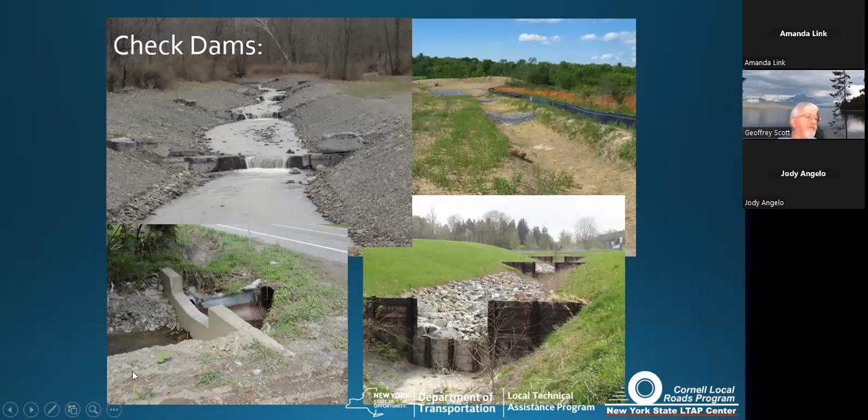So different things that can be done. But check dams, again, the idea behind these is to slow that velocity. By slowing it, it'll help filter out some of the sediment in there. Ideally, you want to stabilize the surrounding areas with vegetation. But again, the idea with check dams is basically to slow that velocity down and minimize the potential for erosion.

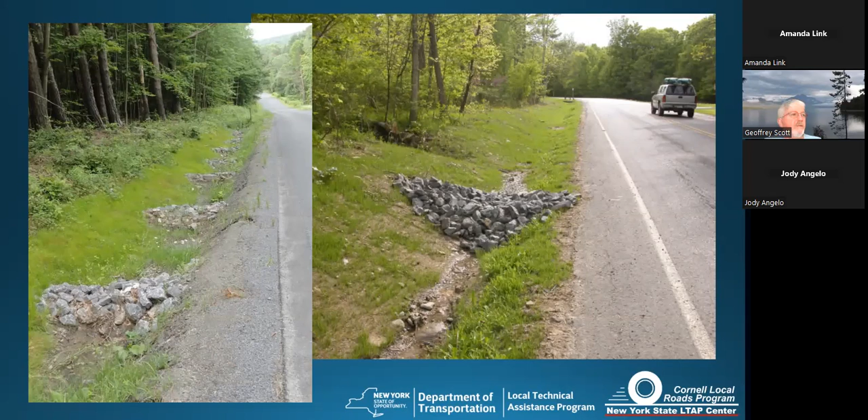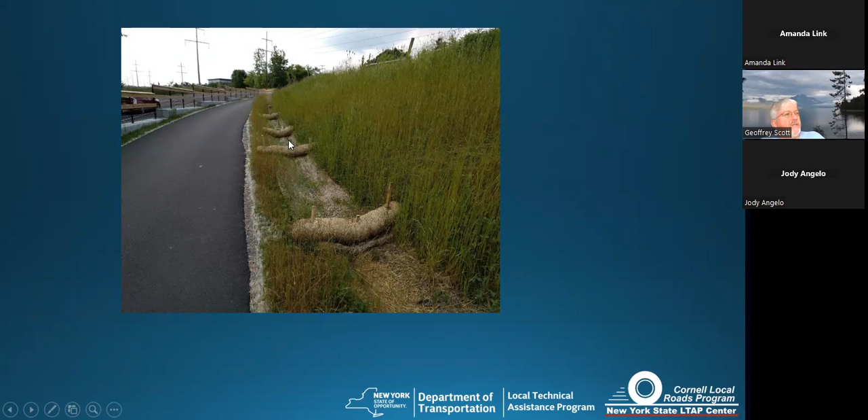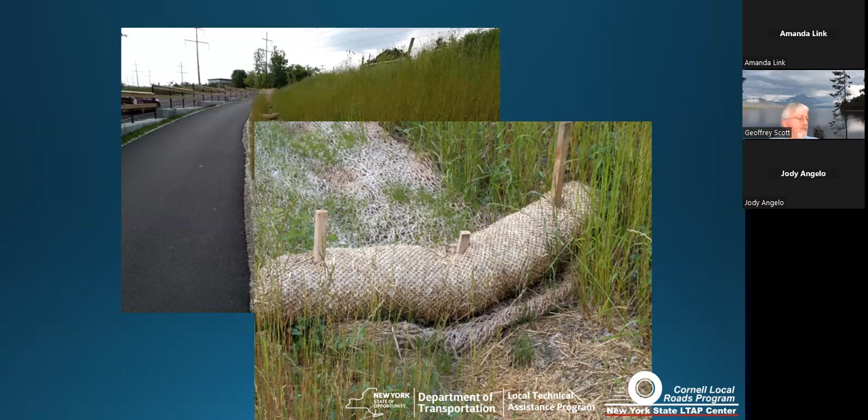And it can be done with these coir logs as well. They've got a fabric down below. Again, this is typically a temporary method, but you can capture that and allow that flow to flow down through here by putting these through. Silt fence will not work in this situation, but this material here is substantially more porous and will actually help filter out a lot of the sediment just by the nature of its design. Again, do not use silt fence in a moving channel of water.

Cleaning ditches typically just involves the removal of the sediment within the vegetation in the bottom of the ditch. You want to remove very little material if you can. You don't want to reshape it. You don't want to redig it. You just want to keep that flow going.

After you've done this, you should check the ditch to make sure that it's stable, and as you go, spread some seed, annual or perennial grass seed, and then walk it in. Typically, cleaning of the ditch doesn't involve changing the width or the depth of the ditch. Again, as we mentioned, if the ditch is too deep, it can be hazardous.

Reshaping is another process. Basically, if your ditch has become a little bit errant and hasn't been maintained in a while, you can reshape it. Typically it involves removing larger amounts of material, widening or deepening the ditch. It can be referred to as cleaning it, but again, the same issue comes along. You need to come down through here, make sure it's clean, make sure it flows properly.

Ideally, some general tips: you start at the bottom and work up. Maybe against traffic sometimes, but again, you can get that slope. If you work down, you can end up too deep and end up with a flat spot or a collection of water, which can be a mosquito nest.

Another thing is to have your erosion control material there. If you're going to put erosion control blankets down, have it there. If you're going to seed it, have it there ready to go. Seed after every day, when that soil is still moist and that seed can germinate in there, or work with your soil and water. See if you can get their hydroseeder over there within a day or so. And you want to do that before the soil dries up and before the rain, because it's all going to cause problems later on.

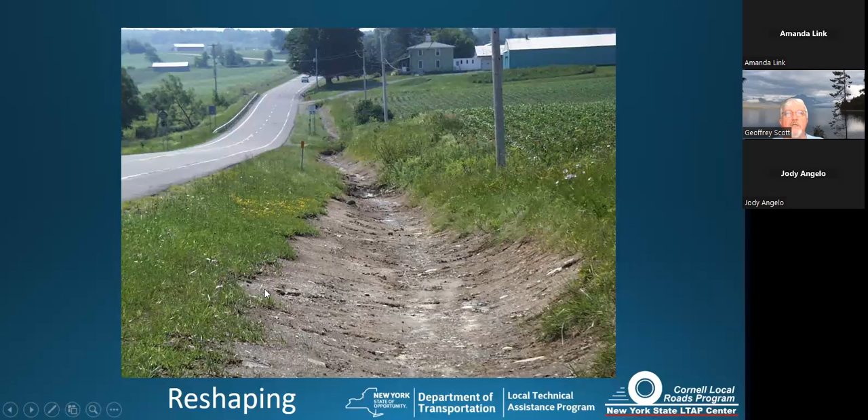All right, so we got another question. Guess we're getting close to the end here.

When ditching, which is not a best practice? Remove only what needs to be removed. Work uphill to avoid flat spots. Reseed every day to promote vegetation. Or the last one, dig as deep as possible to increase ditch capacity. Again, which is not a best practice? Votes are coming in. I'll give you guys a few more seconds.

And the last one is correct. It is always good to reseed every day after you've done any kind of disturbance. If you can reseed that, you're going to get that vegetation growth. Remove only what needs to be removed. Again, you're trying to remove the sediment. Ideally, those ditches are in shape, already there. You don't want to over dig. You don't want to expose too much or cause any kind of slope failures. So letter D is the correct answer for that.

All right, we'll move on to the next one. Question number 4, which is not a means of minimizing erosion? Number 1 is check dams, planting vegetation is the second one, using rain gardens is the third, and exposing soil for extended periods of time.

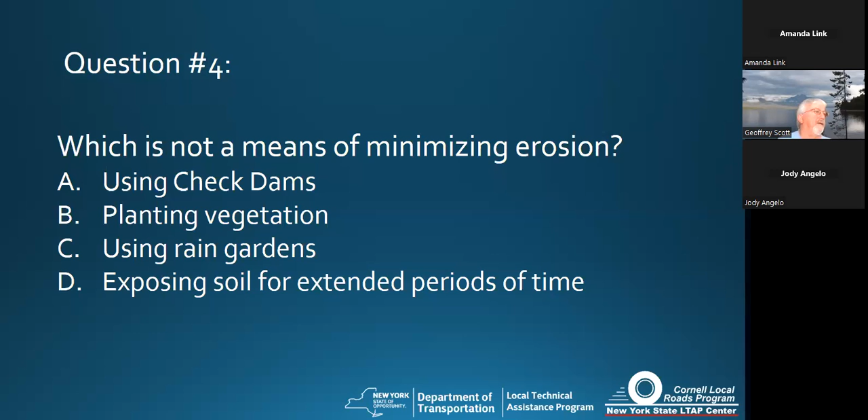All right, so we got a few more slides here. We'll just go through. Again, I can't stress enough the use of the hydroseeders, if you have them available. Schedule it, work with the soil and water, make sure they've got the time to do it, and do it at the same time that you're cleaning your ditches.

Stabilize that soil. It's going to reduce that sedimentation. It's going to reduce the erosion potential as that ditch goes through. You can get that vegetation in there. It's going to help stabilize everything. That'll help reduce any of the issues that you're going to find within that stream and wherever that stream goes to.

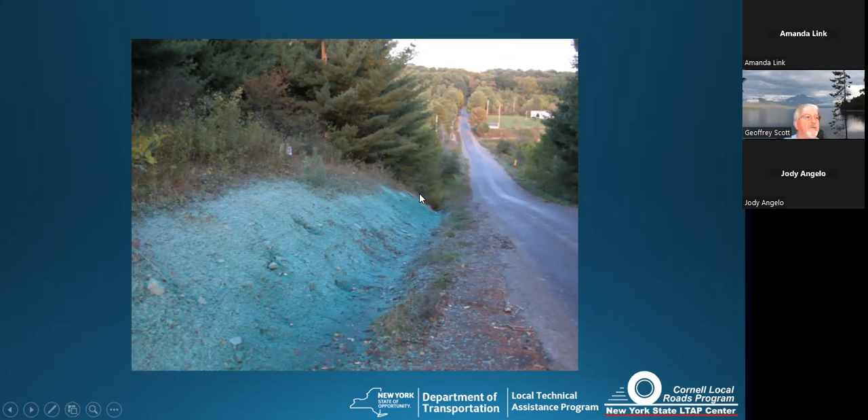Check dams. Again, check dams are used to try to slow that velocity down. Typically, how many you need basically depends on the slope. The bottom of the toe of the next one up would be equal to this. So whatever the slope would be, if it's a really steep slope, the top of this one is going to match the bottom of the one above it.

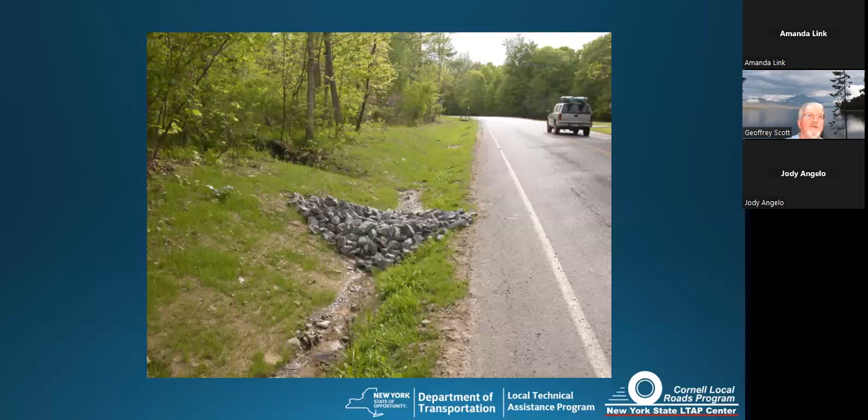So again, the spacing is going to depend on the slope itself, not any given number of feet. It's just going to depend on the slope, and that'll be your frequency of how many you need. And again, you're trying to slow that velocity down. If you let it run too fast and too hard, it's going to get a lot of momentum going. It's going to cause problems.

And your ditches, they don't need to be as deep as they often end up being. If you can just keep them clean. In this case, maybe they built the road up. Maybe this is why it's a little bit lower. But again, this could be a potential hazard. Keeping it mowed is going to help identify some of the hazards that are there.

And if it becomes a potential problem, maybe you want to put some delineators up just to let people know that you're at the edge of the road. It's getting close. But again, deeper ditches don't make better flow. They create hazards and liability.

And in rain gardens, low areas, if you can capture that flow and let it set back into the ground, that's going to be ideal. Particularly in larger parking lots and areas like that, where you don't want to necessarily collect that water and send it into the local ditch. You can capture that, so it'll slow down, the sediment will drop, and allow that moisture to infiltrate back into the ground. That's what we're looking for, that water back into the ground, into the aquifer, recharge the wells, recharge the streams, the ponds and the lakes.

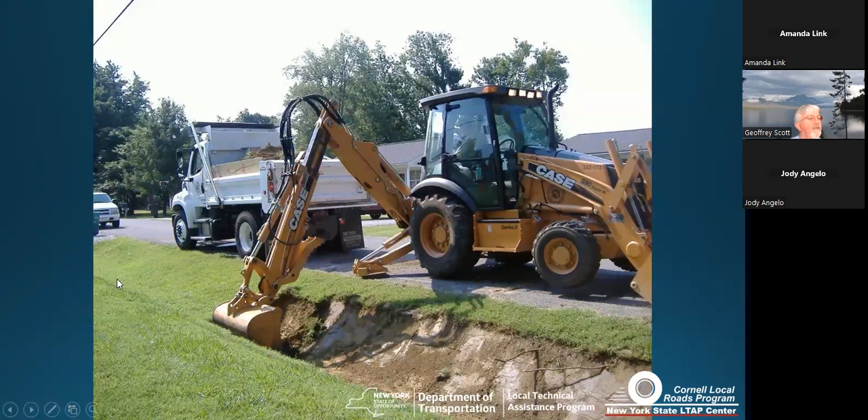And then be aware of what you're actually doing. Digging a ditch for the sake of digging a ditch doesn't necessarily improve what's going on. In this case right here, they're probably not making a difference as far as improving the flow. It looks like it's fairly flat. Looks like they're making work. Now they've got an erosion problem. The homeowner is probably furious because they can't mow it anymore. It just leads to a lot of problems. Be aware of what you're doing. If you can have a vegetated, nice, smooth swale like that, and allow it to flow and infiltrate in, you're a lot better off.